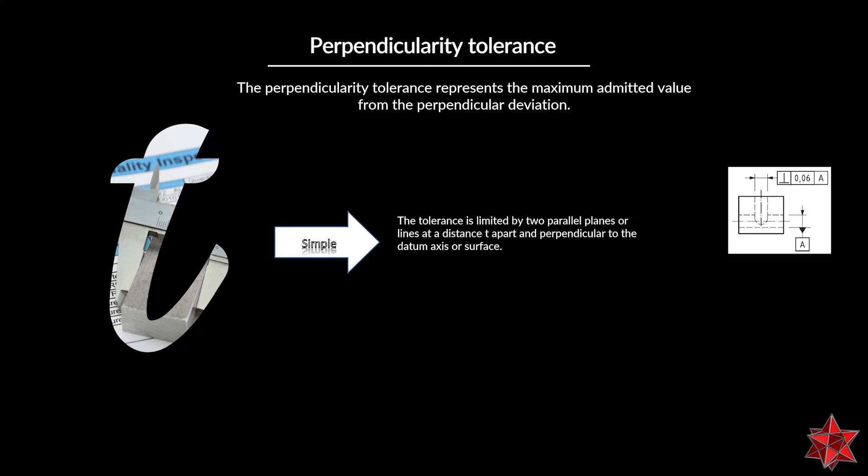We can have the perpendicular tolerance with the symbol of the diameter next to it. This means that the tolerance zone is limited by a cylinder of diameter t perpendicular to the datum. And we can also have the perpendicularity with the symbol of the diameter next to it, but also with the symbol of M, which means that it can be maximum material condition and it can have a bonus tolerance.

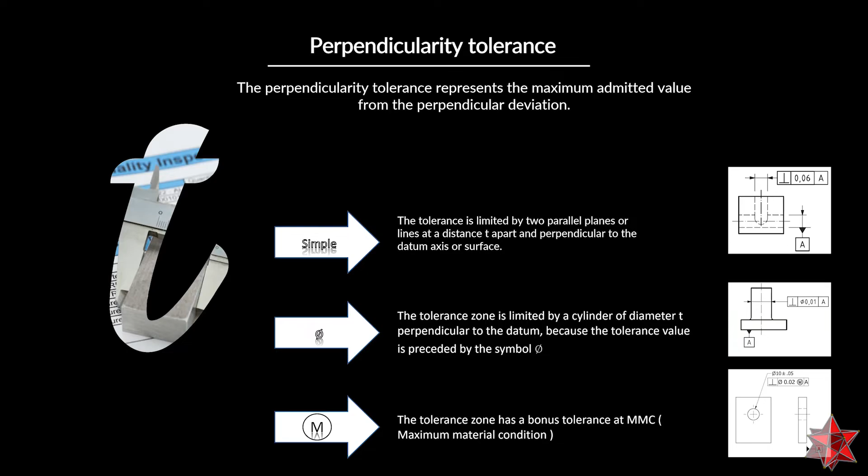And we have four types of perpendicularity. Depending on the features of the parts that we are measuring, we can have an axis perpendicular to another axis, an axis perpendicular to a plane, a plane perpendicular to an axis, or a plane perpendicular to another plane.

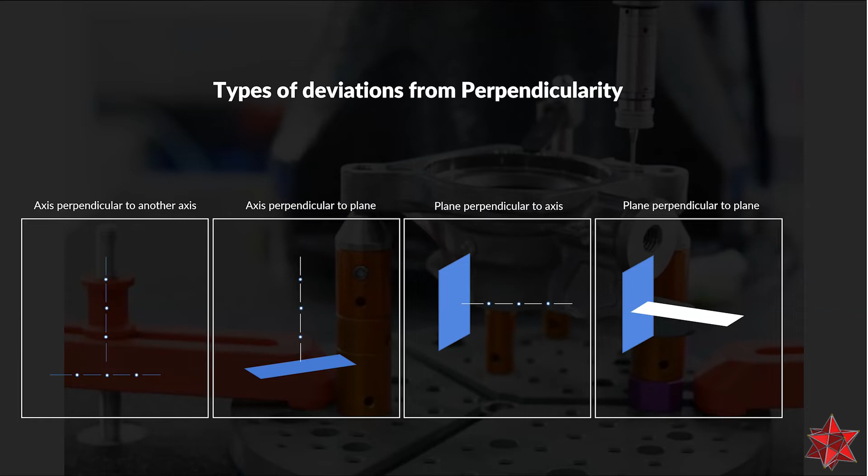I've also made some examples for each type of perpendicularity to understand what the designer of the drawing wants us to measure when he represents these characteristics in the drawings.

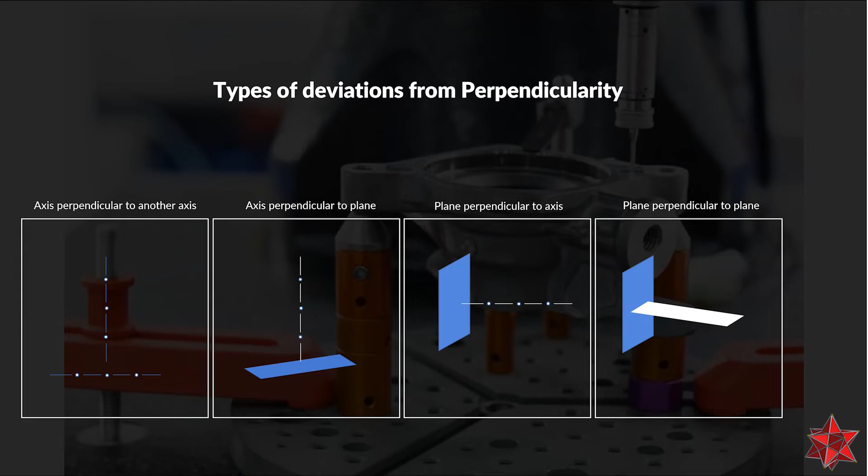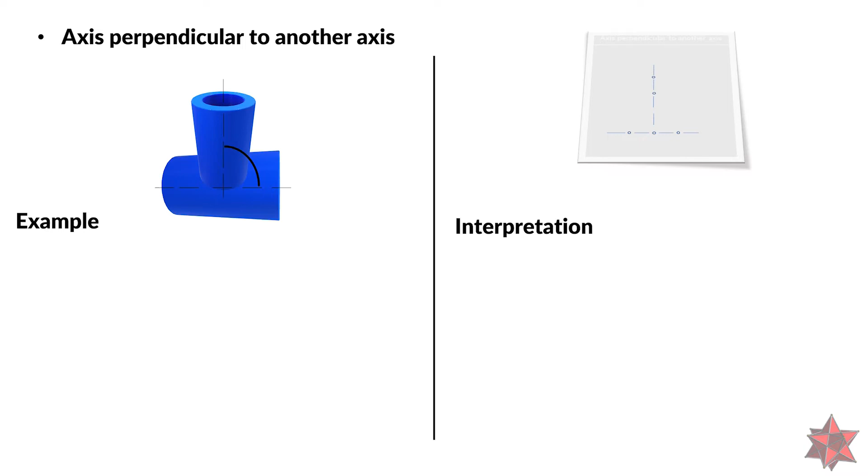And for our first example, we have two cylinders that are perfectly 90 degrees one from another. So we have two median lines, and we can see in the section from the drawing that the cylinder from above has a perpendicularity specification from the cylinder from below. That is reference A. So how to interpret the drawing specification?

Since we know what we need to measure and where the reference is, we can imagine the total tolerance zone of 0.06 millimeters and the length of the cylinder. It's better to have the length of the cylinder because we will measure the whole length of the feature and not some of it. And we know that we want our feature to be at 90 degrees from the reference. Knowing this, we can now go and measure our elements and evaluate the perpendicularity.

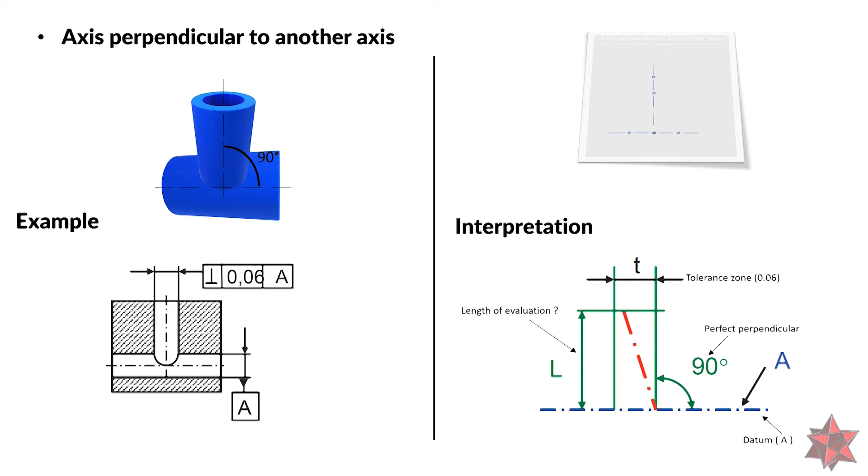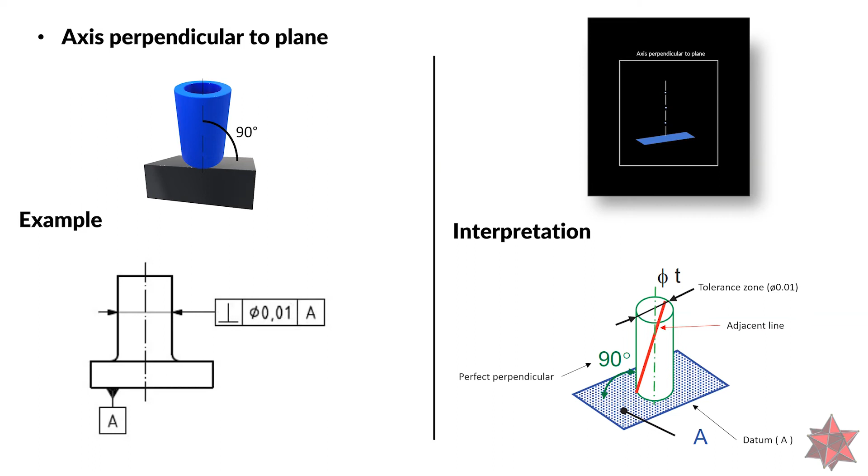In our second example, we have two different features, a cylinder and a plane. So we have an axis perpendicular to a plane. In the section from the drawing, we can see that the cylinder has to be perpendicular to datum A. We can interpret this by imagining the total tolerance zone as a cylindrical tolerance zone where the median line of the cylinder has to lie, in order for it to be perpendicular to the reference plane. Now we can measure our feature and evaluate the perpendicularity.

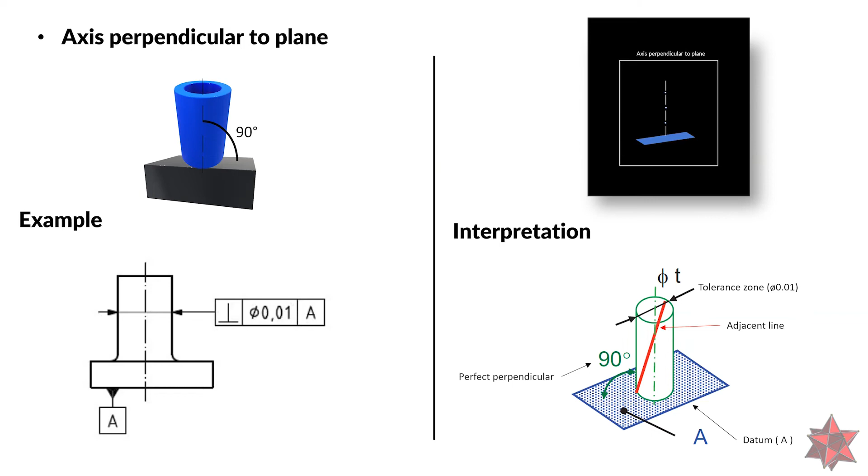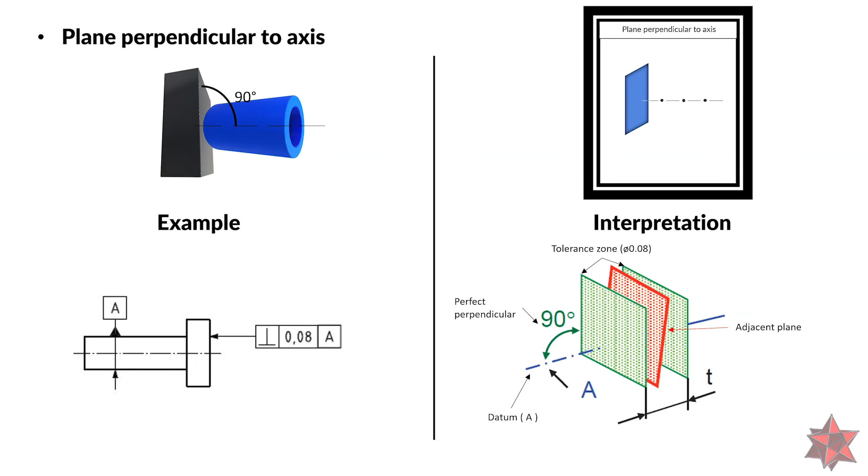In the third example, we have a plane perpendicular to a cylinder. So we have an axis as the datum, and we can also see in the section from the drawing that we have the plane that is constrained to the axis with a tolerance of 0.08 perpendicularity. We can interpret this if we imagine our plane lies between two other planes with a distance of 0.08 millimeters between them and a perfect 90 degrees angle from datum A. Now that we have this in mind, we can go and measure our features and evaluate the characteristics.

And in our final example, we have two similar features, more precisely two planes, and the one from the right has to be perpendicular to the one from the bottom. We can also see this in the section from the drawing, right here. So in order to interpret our example, we have to imagine that our plane from the right side lies between two parallel planes with a distance between them of 0.08 millimeters and an angle of 90 degrees from the bottom plane, that is our reference A.

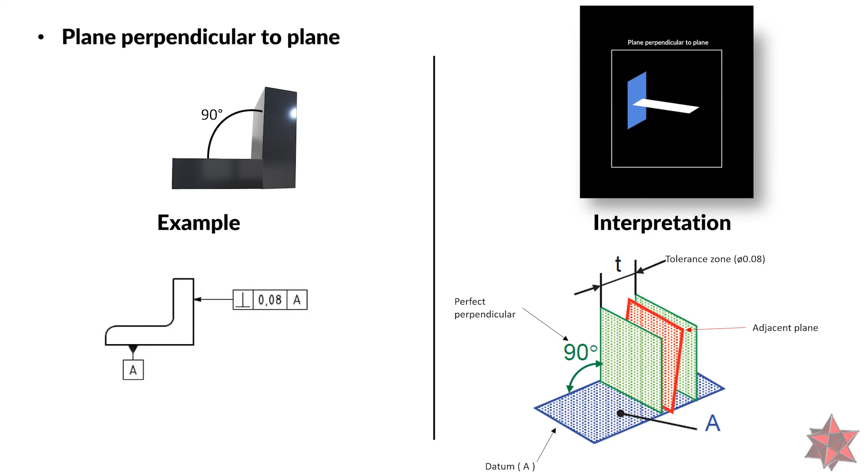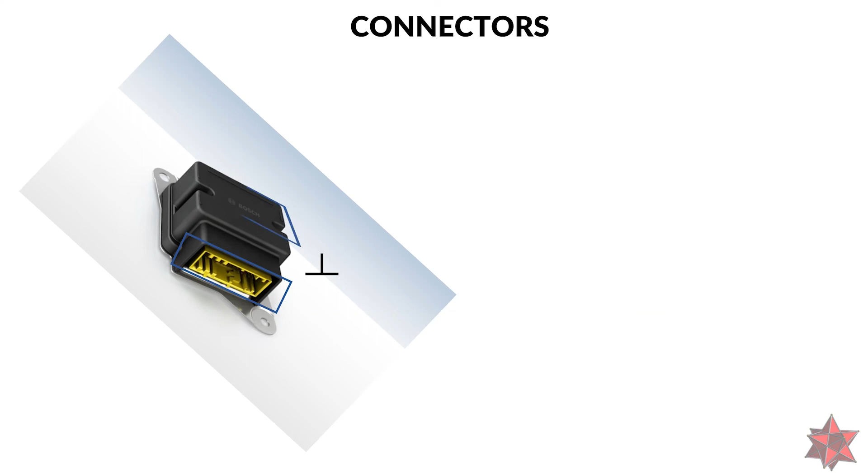I also selected three real-life examples where perpendicularity is required. Connectors. Notice how the plane from the front of the connector is presented at 90 degrees from the plane at the top of the connector. Here we have a classic perpendicularity requirement. Also, for this connector, the cylinder where the counterpart connects has to be perpendicular to the interior plane, that we cannot see, but we can imagine where it can be.